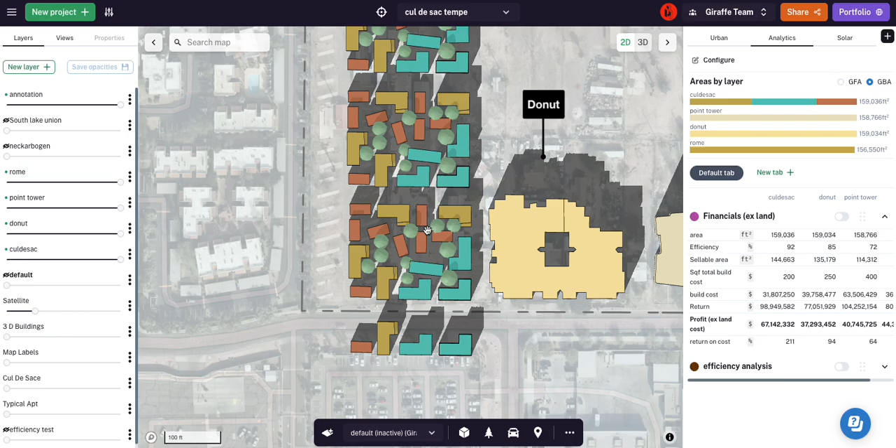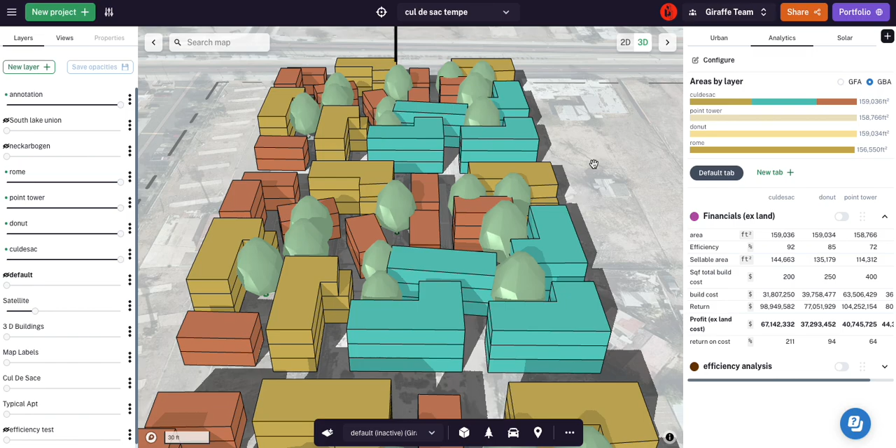It's these very small, some of them like 20 feet wide, 3-story buildings, closely packed, with a variety of spaces, little courtyards, little alleys. It's really nice. It's got a European feel, and it has some advantages for the developer. The first advantage is I think it can be point loaded, and so you don't need multiple escape stairs. It probably doesn't need to be sprinkled. I'm not across the US building code as much as I should be, but it's very low.

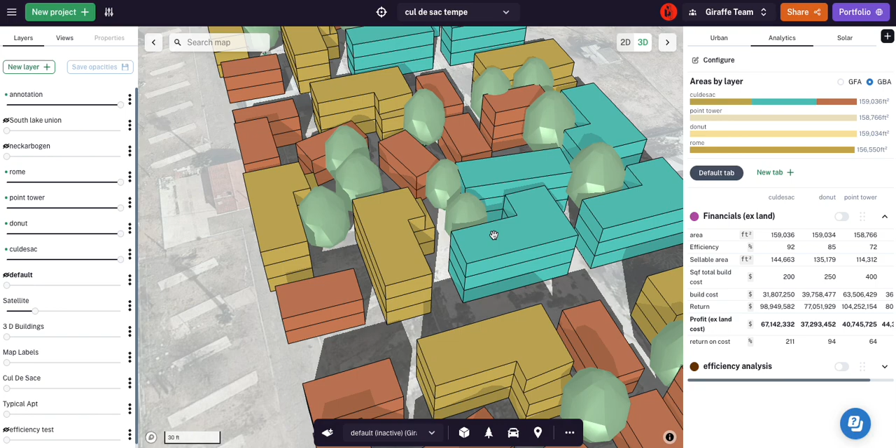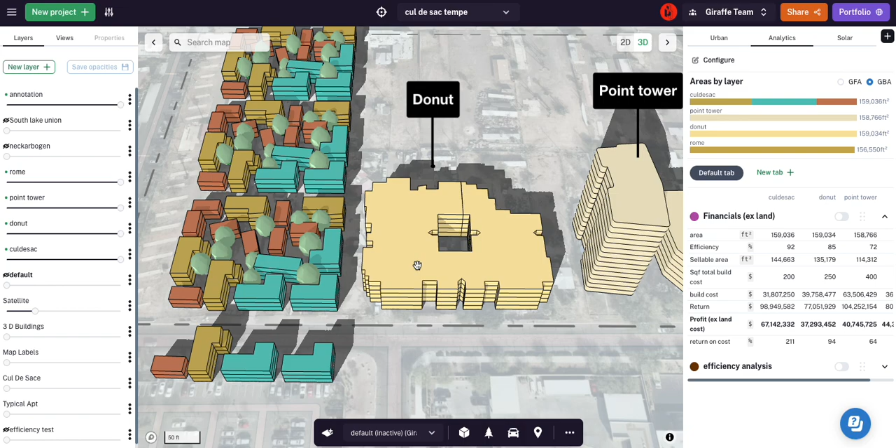The light comes in from both sides, and the cross ventilation is very good. So a room here, like a 20-foot wide room, can have the air come across it. As opposed to this building here, which is a classic multi-family apartment. So I just copied this building over here, which is just down the road from Culdesac in Tempe, Arizona. And you can see that's a whole lot of building, right?

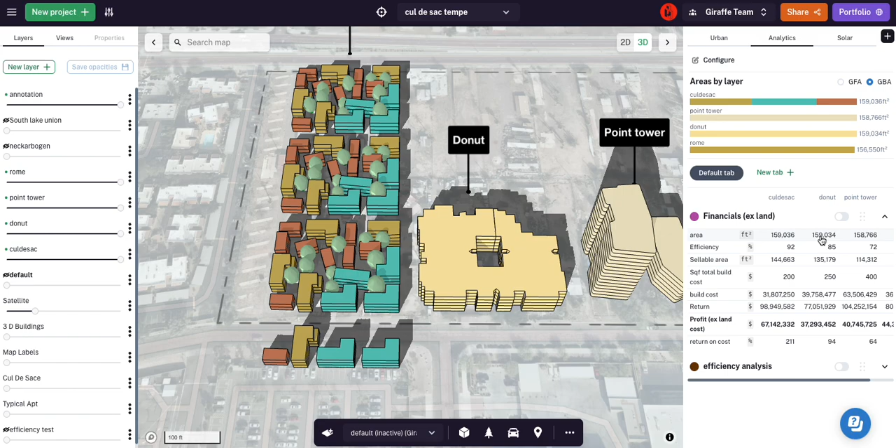It's much bigger. It's almost like 90 feet wide. You can see these dents to make it a bit smaller. And the way I've modeled this is there's actually as much gross floor plate in this building as there is in all of these buildings. If you added all of these up together, you would get this 159,000 square feet. So these are sort of, I guess, two American typologies now. It's a land of contrasts.

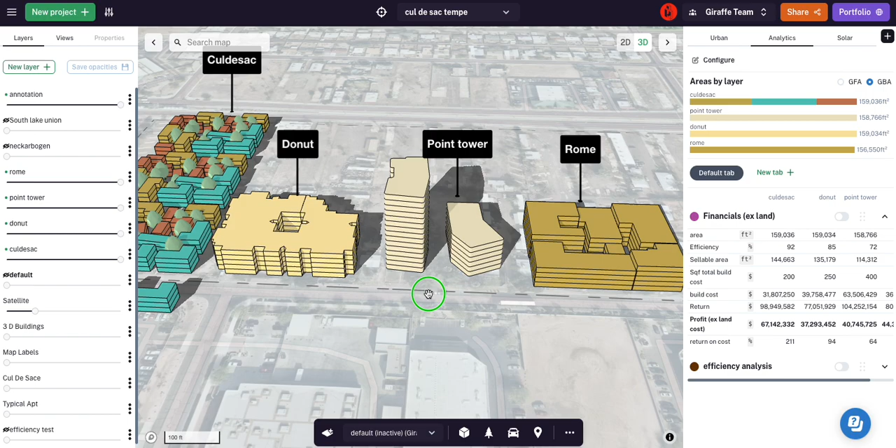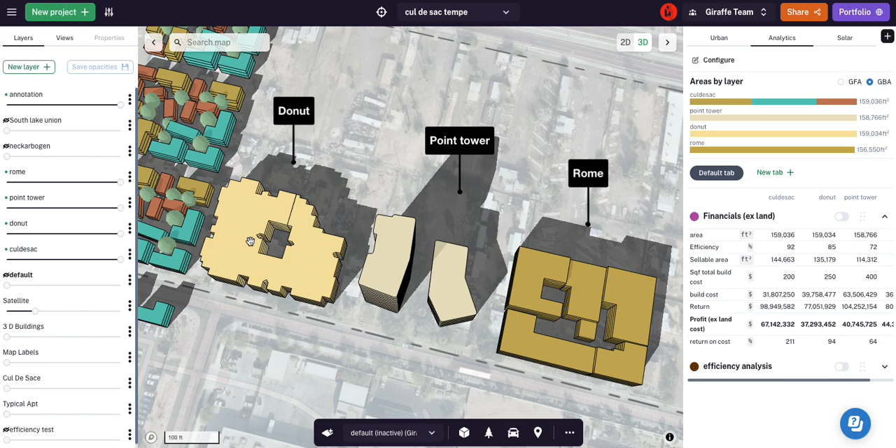Here's a point tower. This is certainly an Australian typology. I think it's also an Asian typology. These are sort of 60 feet wide, double loaded buildings. A bit narrower than this, but sort of similar in concept. But you go high. You go high to get views, because value in Australia is certainly found on the higher levels. That penthouse feel.

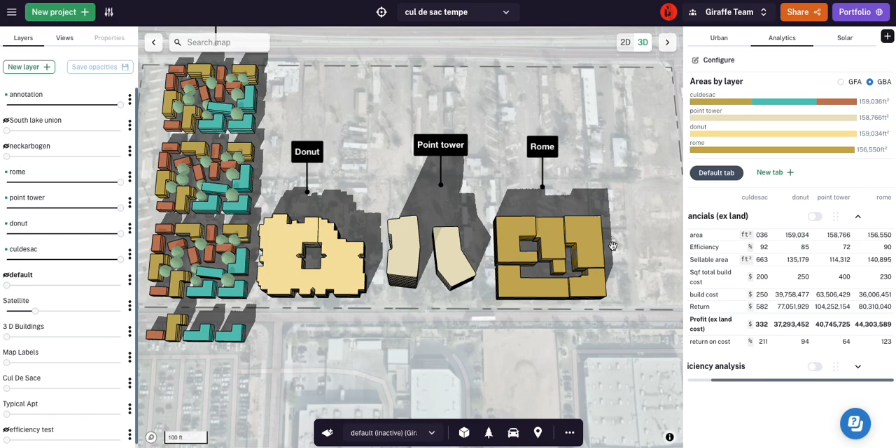And then I went and copied Rome, the eternal city, and I placed a Roman block down. So these are actual blocks that I've got, and this one I just made up. But all of them are approximately the same amount of gross floor area.

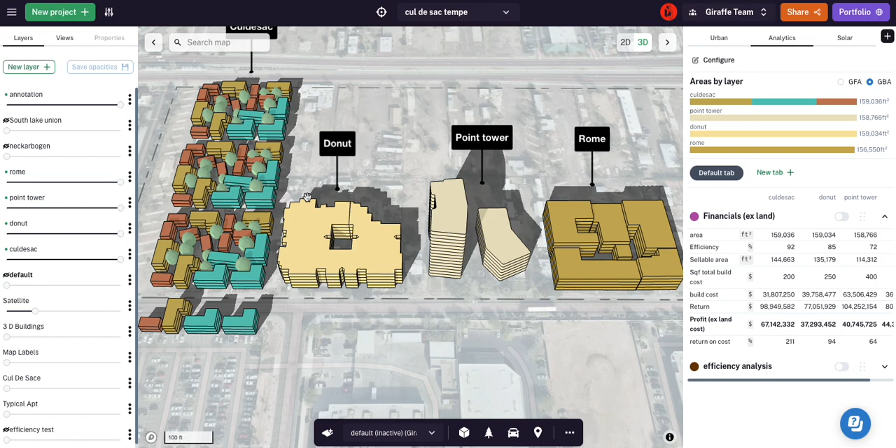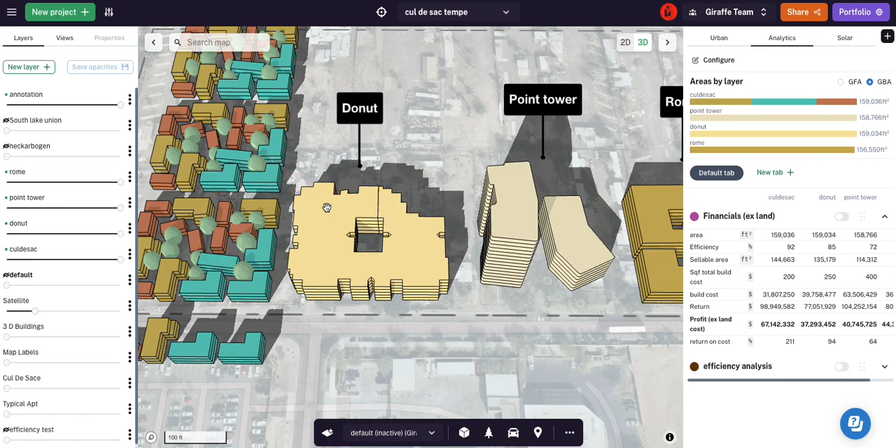Right, so let's first off examine the financial implications of these things. So the gross area is the same, but the efficiency of these buildings is different. The Culdesac probably has an efficiency of about 90%, because there's no elevator. It's probably just stairs up, stairs down. There's no corridor. The donut has an efficiency of about 85%. It's a big floor plate, bigger than would be allowed, say, in Australia. But there's still quite a lot of mechanical plant services, and also corridors and elevators.

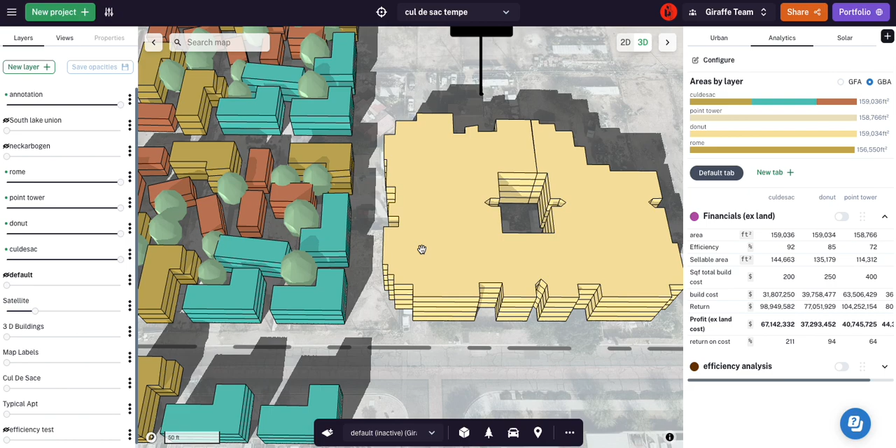The performance of a space like this depends on mechanical plant, whereas something like this works without electricity, right? Which is why you can get 200-year-old houses of this dimension that haven't rotted or gone to mold, because the air and the light move within them. These kind of buildings, you do need a service, because they're very deep, get very dark, very still. The air doesn't move through them because there's walls in the way.

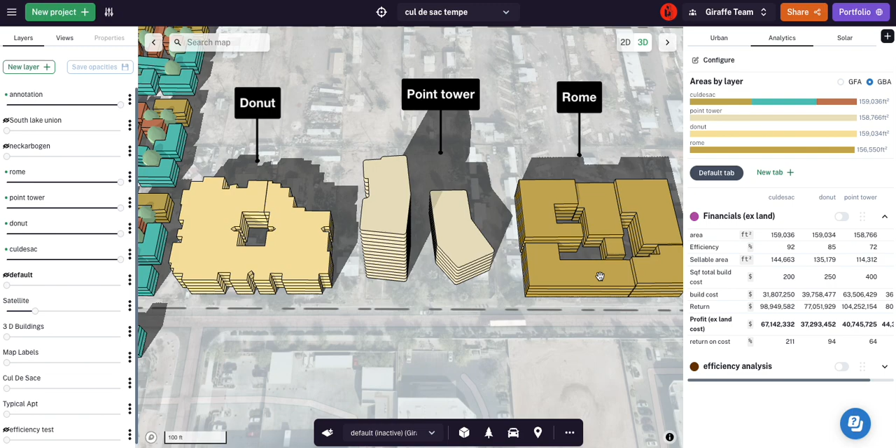The point tower efficiency is lower because it's vertical. So every duct goes through 20 stories instead of 1 story. So I've put it at 72. And the efficiency I'm talking about here is the gross to saleable efficiency. So it's excluding the corridors. And then Rome, I've put it at 90%. And Rome's an interesting one.

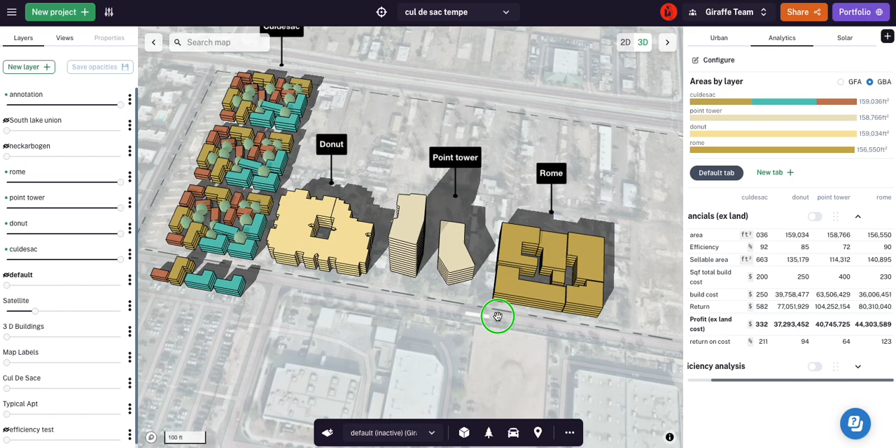They're very old buildings, hundreds, if not thousands of years old. They've made the sacrifices that you make with Culdesac. It's just point loaded. They may have retrofitted an elevator in there, but probably not. So it's extremely efficient, but it's also bulky and dense. Although I will just encourage you to notice the difference in this courtyard shape, right?

Notice how happy the old buildings are doing sort of quote-unquote irrational or funny things, but the net effect is much smaller cross-sectional depth to these buildings, so the air will move through them, right? And the light can penetrate those floor plates without electricity. Now you can see that this has come from what Christopher Alexander would call a living process, as opposed to this. You can see this is designed more than this is designed.

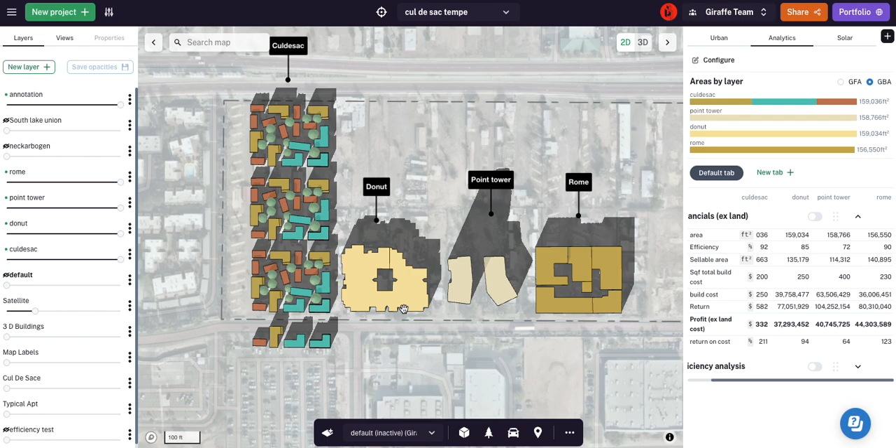Not necessarily bad, just designed. All right, so with the same gross area and those different efficiencies, you get different sellable areas. So you actually get 10,000 additional square feet within the cul-de-sac. The square foot total build cost is also different.

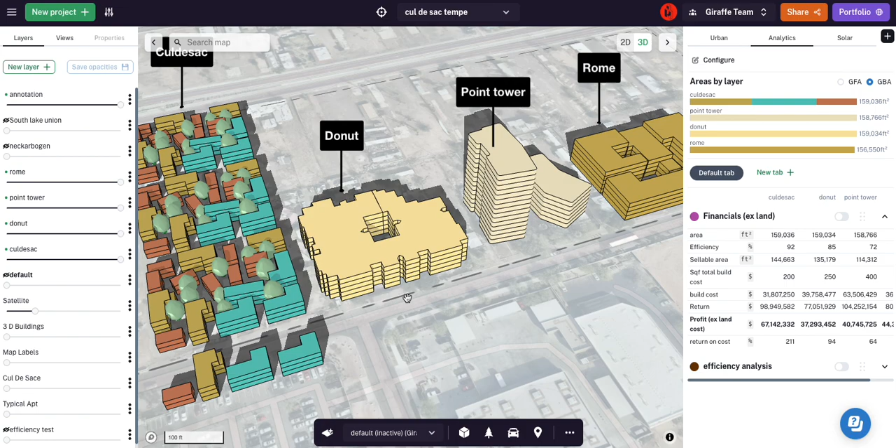So cul-de-sac is about $200 per square foot. The donut is 250, mainly because you've got to build a lot of corridor. You've got to build a lot of elevators and services and plant. It's also taller, so it's up to 5 stories. So the structure's a bit beefier. There's more sprinklers. There's more safety considerations. To get people out of this thing is non-trivial. You need to engineer it.

To get people out of these things, trivial. You just run down the stairs and run out. Like if the fire's over here, you run that way. These things are very, very robust. You can jump out of most of the windows in this thing. They're only 3 stories, right? You can do the cartoon thing, tie the sheets together and make a rope.

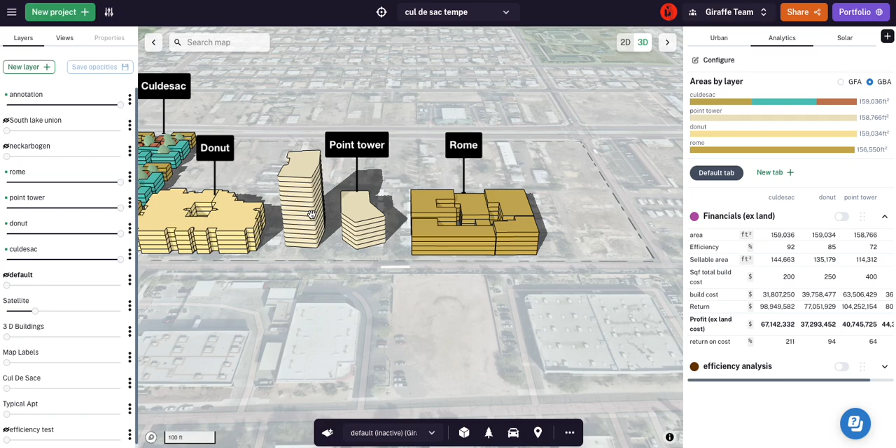Point towers also have to be very highly engineered, and the structure relatively is more expensive, etc. So they're $400 a square foot. And then Rome, I've put at 230, somewhere in between the donut and cul-de-sac. And so when you do that, the costs play out like this, and the return actually favors cul-de-sac because I've made that as an assumption.

So the square foot rent, like net sellable rent per month per square foot, I've put at $3 per month in the cul-de-sac typologies, which are Resi type A, B, and C. I've set it for $4 in the tower, that penthouse feel. It's a premium offering. And then I've set it at $2.50 for the donut Resi and the Rome Resi.

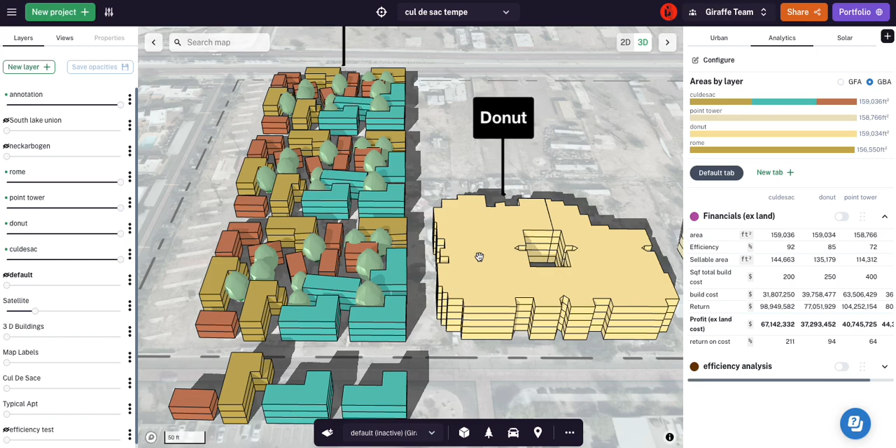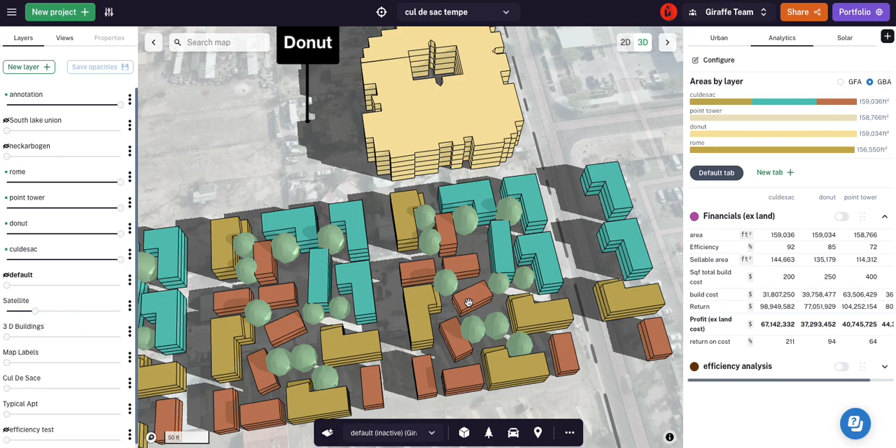Because I do honestly believe people would pay a premium to live in a neighborhood like this over something like this. Because this feels like Santorini, or it feels a bit like Paris. It feels very, very cool. And I can see this being a highly differentiated offering. I can imagine me and my friends all living in these little huts. It'd be sweet. I think certainly people of my generation and younger would respond really well to this.

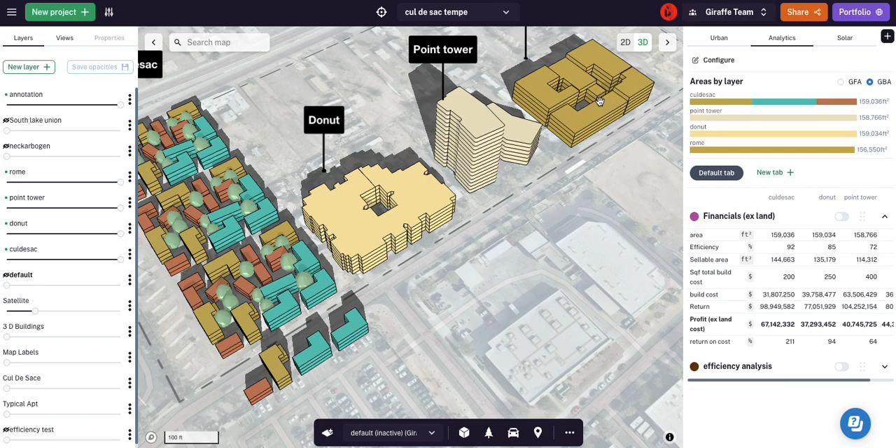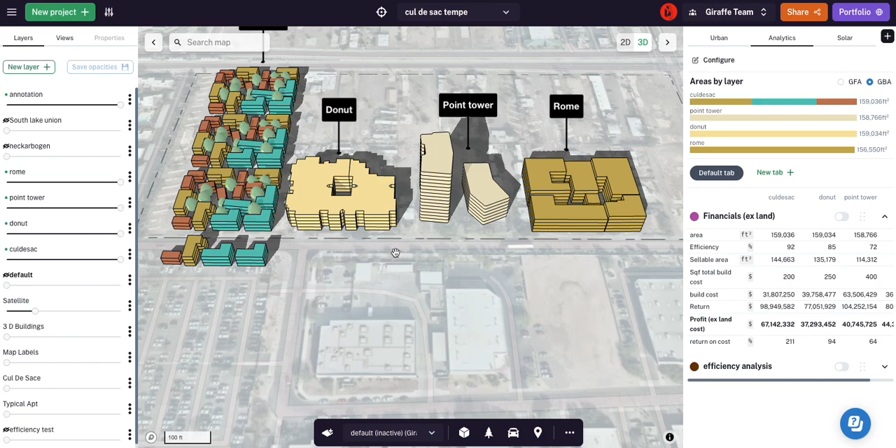And so then the profit is massive for the cul-de-sac, much bigger than the other two. But notice that this is ex-land, and the amount of land that this development has taken to get the same gross area as this development is about three and a third times more. So if you only had one parcel, it's much more rational for a profit maximizing developer to build something like this, or this, as in, even if your return on cost is lower, you make a bigger absolute profit. So of course the profit incentive says build as much as you possibly can.

So applying this kind of density to it will still result in a profit. So I'm sure cul-de-sac are not losing any money on this. And they may be figuring out ways of getting that 3 that I've assumed up to a 4 or a 5, ways of actually really making this place sing from a desirability perspective.

Okay, and so then the other thing that I'm interested in is the efficiency. So I'm imagining a constant size of 900 square feet per dwelling, but the maths works out the same, right? The more efficient buildings have more dwellings, obviously, because they have more sellable area, less area that is not dwelling, less corridor. And I'm modeling out 2 people per dwelling, and so more people live here.

And now here's something interesting: what I modeled out is a car factor. So cul-de-sac is car free. And so what I'm applying to the cul-de-sac developments is a car use factor of 0.3, which means they use only 30% of the car use an average person would, because they don't have a car.

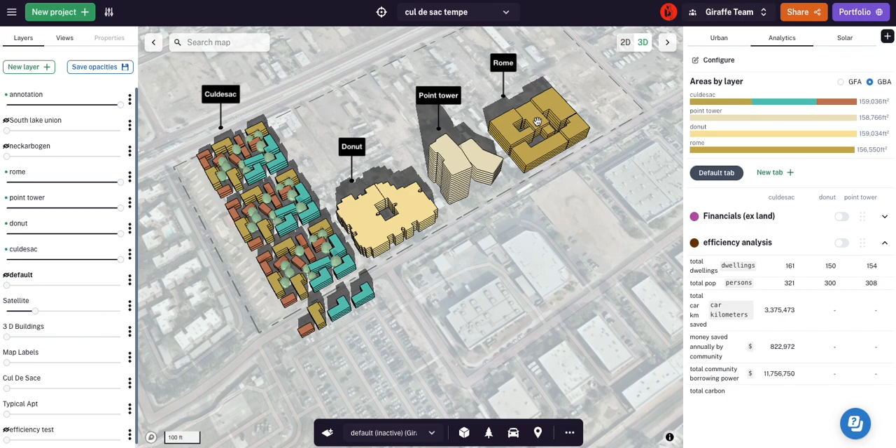And Rome is actually an optimized cul-de-sac. Rome was designed before the cars, before carbon, when energy was expensive, when active transport was the only transport essentially. And so I think you can derive really good high quality built form from this kind of typology, which is closer to this than this. I think a lot of what's driving this is code, how you rescue people, how you evacuate people, hose length for fire, in the absence of safety systems and sprinklers, etc.

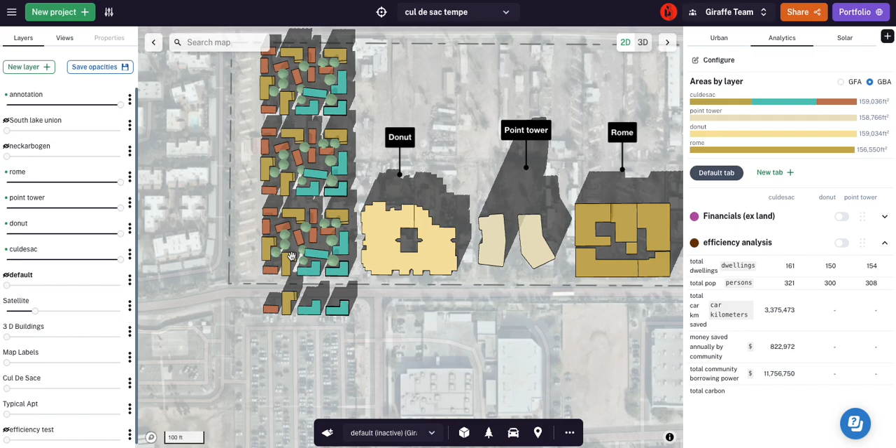But these guys are actually building this, so incredible. Well done. They've sold it, they've financed it, they've built it. It's always easy to talk in theory. It's very, very difficult to actually get something different done. So incredible outcome.

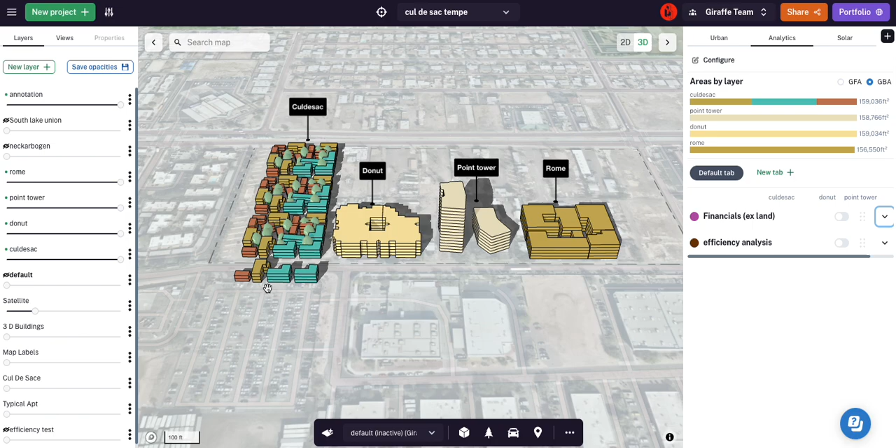So yeah, two things. I'd be interested to hear, have I got my figures right? I've done a fair amount of Google-fu to get these numbers, and I think they're okay. But I'd love to have them pushed back on if they're wrong. I'd also love to hear whether my gut instinct on this being an extremely attractive kind of build form is right.

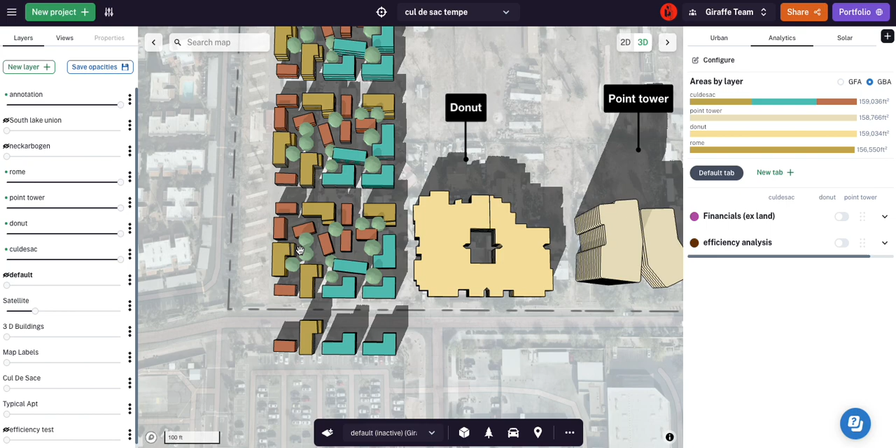Okay, and the last thing I'll talk about is the other thing that I really like about this build form is that each of these is separate. Each of these is a separate building and could be delivered by a separate developer or builder. Right, so if this building burns down, it's not the end of the world. You just rebuild it, or you demolish those 5 and you build a big one.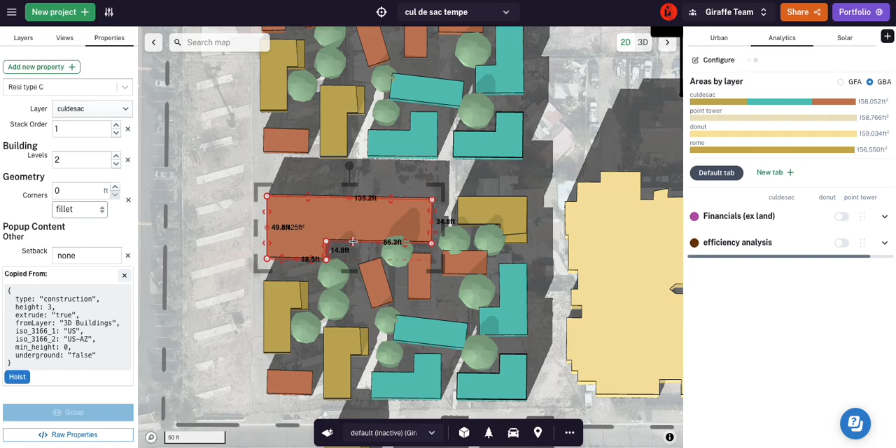Like if in 10 years' time things are going terribly, we copy paste and we do something like this, right? Maybe it's a school, maybe it's a dense building, maybe we're not getting the density we need, and we just do that. I would suggest that we try and keep them as small as possible, but there's really nice features, robustness and redundancy to this kind of a layout, or this kind of a build form, that these two definitely don't have. This one actually does have, because these are separate buildings.